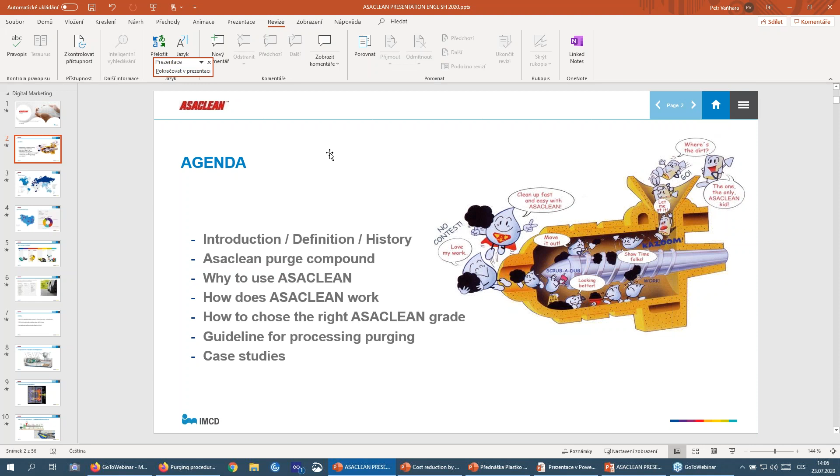Then we will go through some case studies. We will show you some cases and tests which we did in production, because we are focusing on the technical side and following technically with support in production. So we have some photos from some applications.

Okay, so company IMCD operates all over the world. Just to go a little bit in depth, in Europe, or Southeast Europe, we are based in Prague, and we are focusing on the Southeastern Europe market. Just to have some idea, we have also another division called advanced materials - advanced materials like all polymers for plastic. So we are not only doing purging compound, we are also doing some polymers and additives, but that's just information. We are focusing on a lot of markets, lot of products, and applications.

Okay, so IMCD, it was before Velox, just to have some idea, and then we can go a little bit technical. So injection molding machine, I guess most of the audience know it. There is a hopper, a barrel, and injection unit. The material comes into the hopper, then it's melted to temperature, and then it's injected to the mold, and then the end application comes out from the machine.

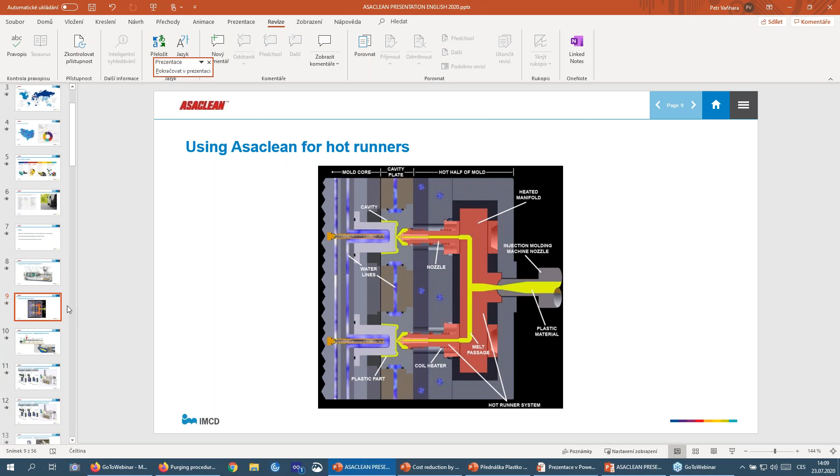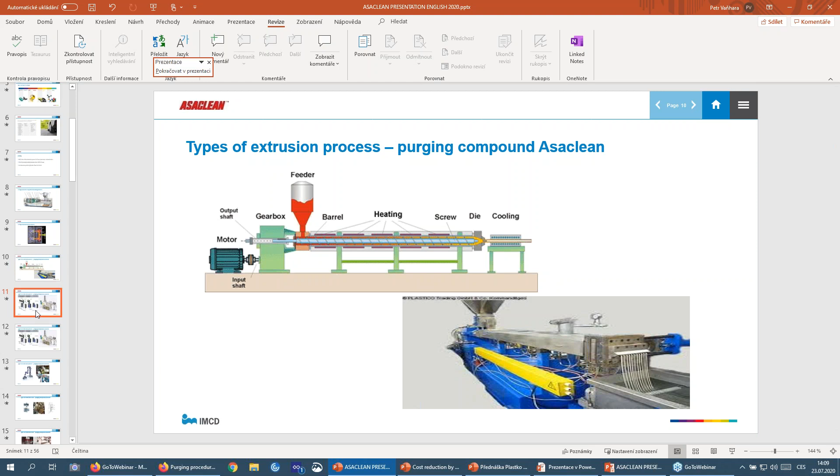On the other hand, we can switch to extrusion. At extrusion, as you know, there are a lot of types. Purging compound can still be used for a lot of kinds of extrusion, for standard extrusion profile, or as you can see on the other picture, for filament producers, or for extrusion blow molding applications, when the polymer is injected to the mold and then blown for the end application, like a bottle. So we can use it also for this process.

For compounding lines, you can see on the right side, you can also use purging compound for compounding lines. But it's a little bit more tricky, because at compounding lines there are a lot of polymers and a lot of additives and fillers which are added to the machines, so it's much more tricky than standard profile extrusion line cleaning.

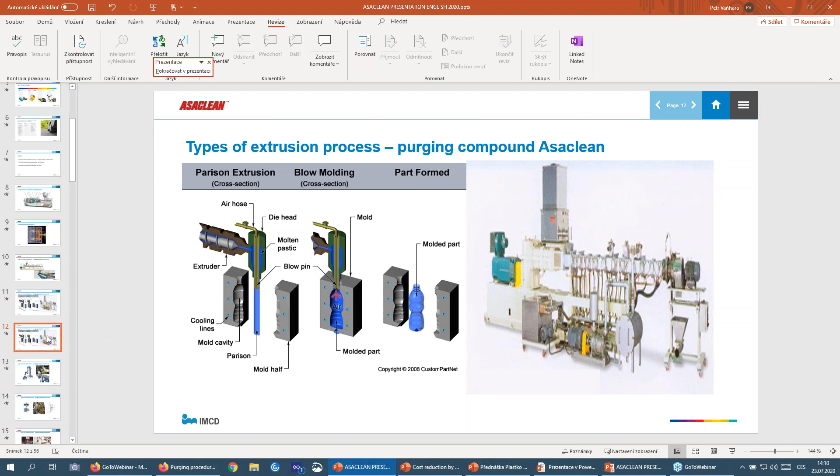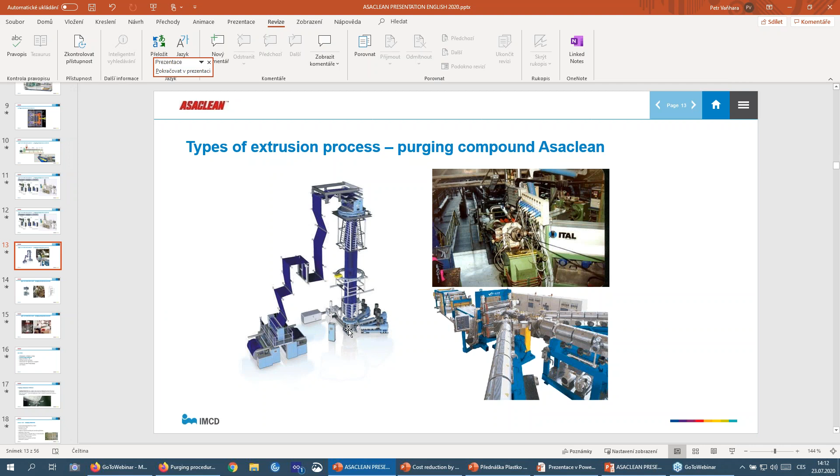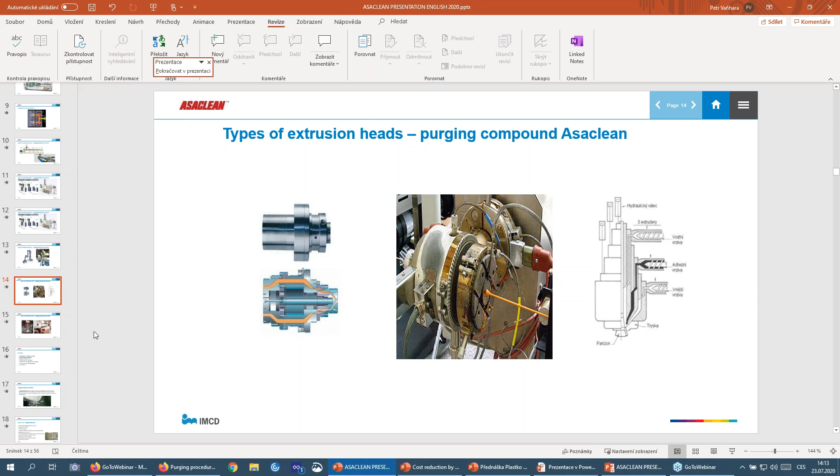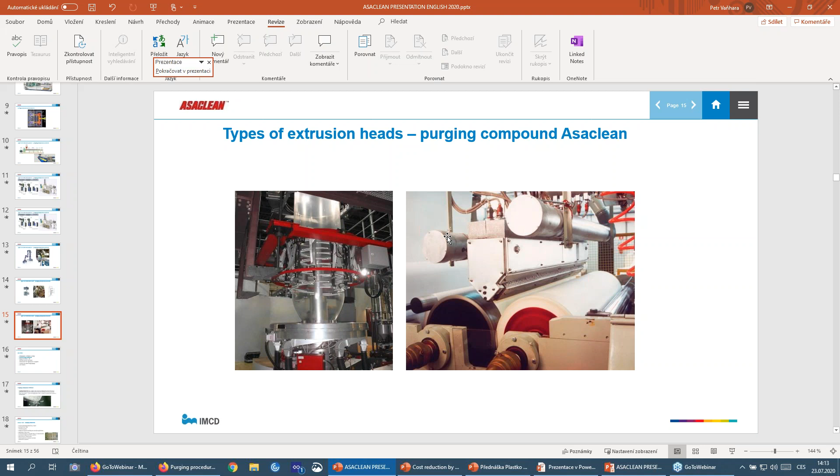So let's go a little bit into what purging compound ASACLEAN is. What is it? What is inside? How does it work? Let's go a little bit deeper. What is really purging compound ASACLEAN?

Purging compound ASACLEAN comes in granules. There are a lot of types of ASACLEAN, and it's still based on some base polymer. Into the polymers, they add some additives which are responsible for the chemical cleaning - just to have some idea, there are detergents and tensides which are responsible for the chemical cleaning.

There are also some grades which are filled with glass fibers - two grades, one filled with 20% glass fibers, and a second type filled with 50% glass fibers. But they have really small length of the glass fibers, approximately 20 times shorter than in standard polymers with glass fibers. So there is no issue that you will damage something in your screw or in the barrel. Just to have some idea.

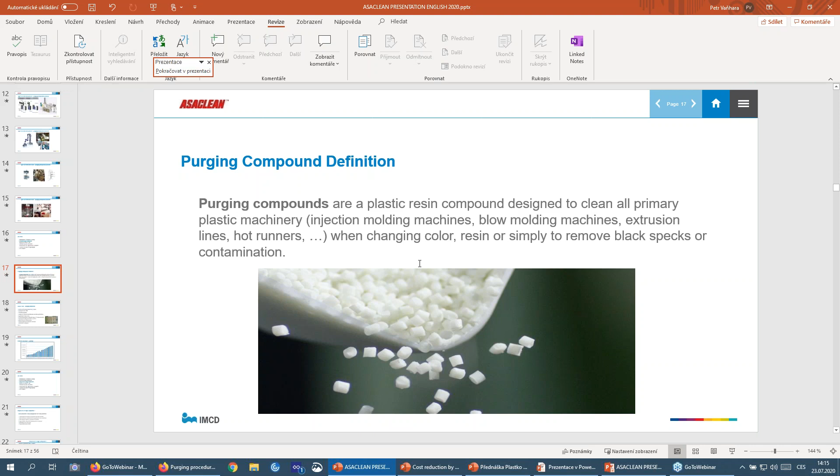So a little bit of the history. The product is produced in Japan. It's produced from 89. There are approximately 17 main grades. There are some grades which are still under development on demand from the market. So it's still moving on. We are trying to focus on the market and what the market is asking.

The temperature range is from approximately 160 degrees up to 420 degrees for the special technical engineering polymers. Standardly, most grades of the purging compound ASACLEAN are styrene based. Then some grades are polyolefin based, and some special grades are polycarbonate or PMMA polymer based.

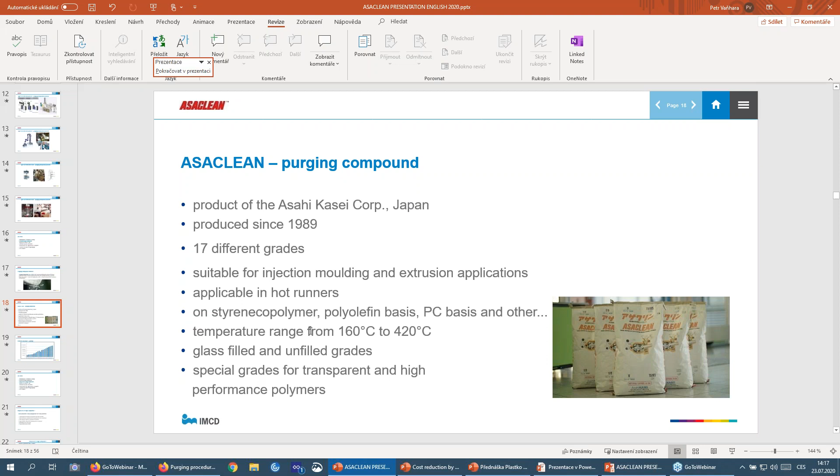As I mentioned, there are also some glass fiber grades, and there are also some special grades for transparent applications, which are very useful for automotive applications, like for injection molding producers which are producing the front or back lights of cars.

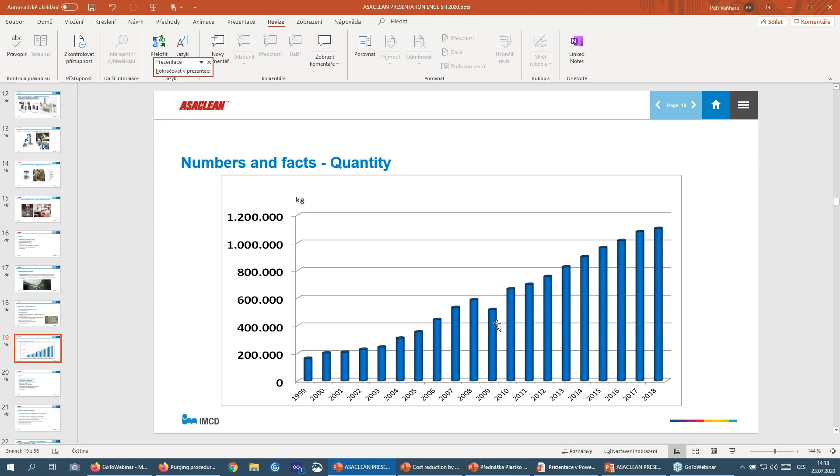There is a small slide just to give some idea of the purging compound ASACLEAN used in Europe, to have some overview of how it increased. There was a little step down after the crisis of 2008.

Okay, let's go through why to use purging compound. Some will ask why not use standard polymers, and what are the advantages of purging compound. Mostly purging compound is used for color and material change, because there are black spots in applications, mostly in transparent applications. But the goal of using purging compound is mostly to reduce the time of switching material or color. It's mostly the economical way.

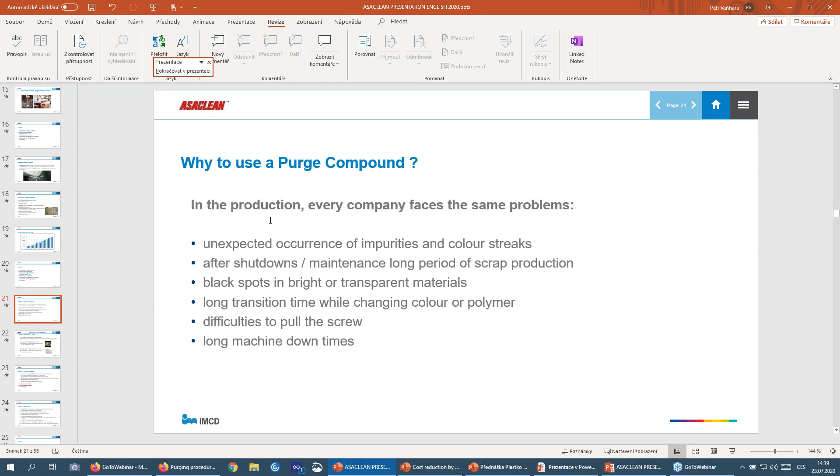I give one slide of possibilities. There are three possibilities to solve problems in production when we have a color change, black spots or not okay applications. The first possibility is flushing with the raw material or base polymer. For example, if you have a color change of polypropylene, some productions also use polypropylene for purging. Sometimes it works, but it takes a lot of time.

We have seen at some productions that it can take from 4 to 8 hours. In the end, maybe you have the application you would like, but it really takes time, and there is a lot of flushing of raw materials. In low applications, when PP costs 1 or 2 euro, it's maybe not so big a problem. But when you use high engineering polymers, the costs increase much more.

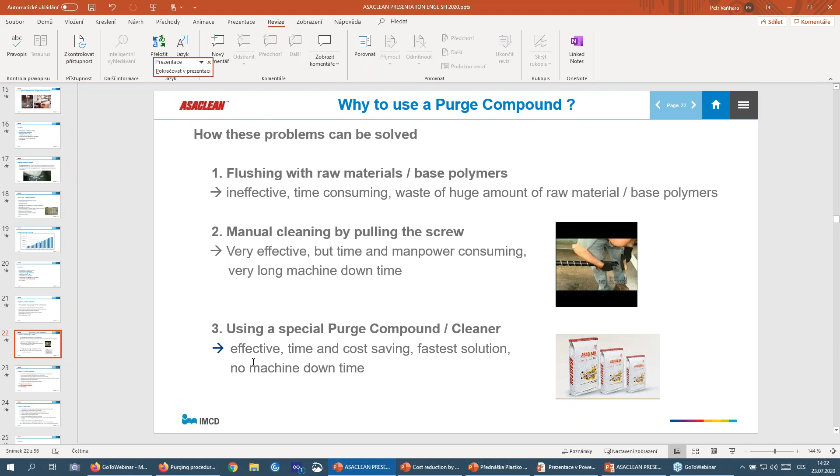On the other slide there are still some words on why to use purging compound, but really the message and the goal is to produce more efficiently, mostly to save time and manpower, and globally to save money in production in the plant.

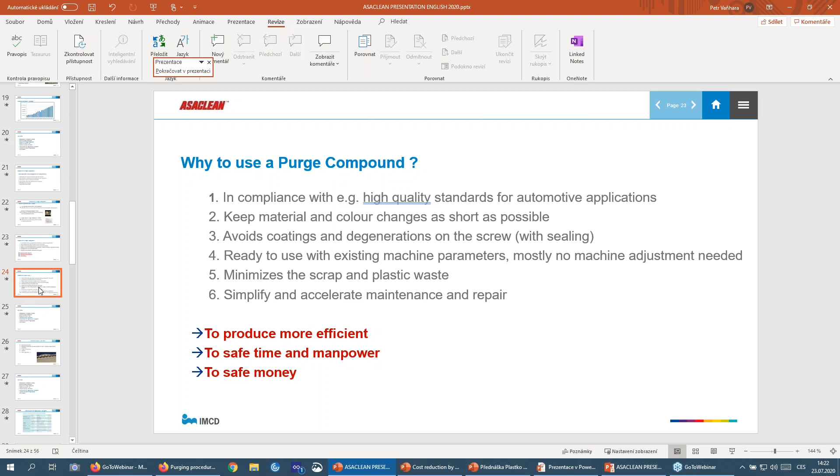Another slide, why to use purging compound. As I mentioned, it's mostly used for color change, to minimize scrap, and to work much more efficiently and effectively in the plant.

Okay, now how does ASACLEAN work? Let's go a little bit deeper into the grades. So how does purging compound work? First, it's mechanical cleaning, like when you use standard polymers like standard PVC or standard polyethylene. Second, we try to use the same chemistry.

So there are a lot of grades. For example, if you have a polystyrene material change, we try to go with a purging compound which is on the same chemistry, a polystyrene based polymer. Then it's working on the viscosity.

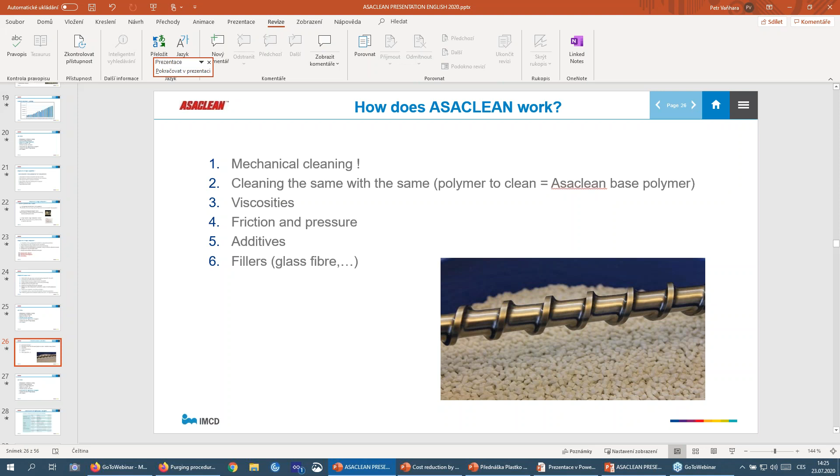So when you put it inside your machine, the ASACLEAN can stay in the machine, and due to the antioxidant inside the purging compound, it inhibits the degradation of the polymer and of the rest of the polymer in the barrel and in the screw.

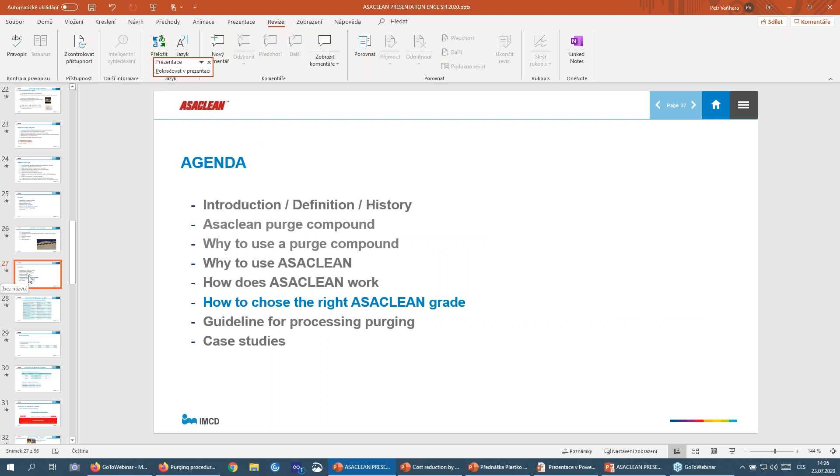Okay, how to choose the right grade of purging compound? It's always the question. There are approximately 17 grades. So basically, I will go a little bit through the main grades which are used in injection molding.

From our experience for injection molding in automotive and other applications, for a lot of engineering polymers like polyamide, PBT, ABS, PCABS, we have good experience with ASACLEAN GL2, which works from 180 to 330 degrees. In the TDS it's mentioned up to 330 degrees, but from our experience you can go up to 360.

Or I will go a little bit historically. Before, it was also mentioned in the TDS up to 360, but sometimes at 360 degrees we can see a little bit of vapor coming out from the machine, and if you don't have an exhaust system, some plants have a problem with this, but the material is safe. It's just the vapor coming out from the purging compound.

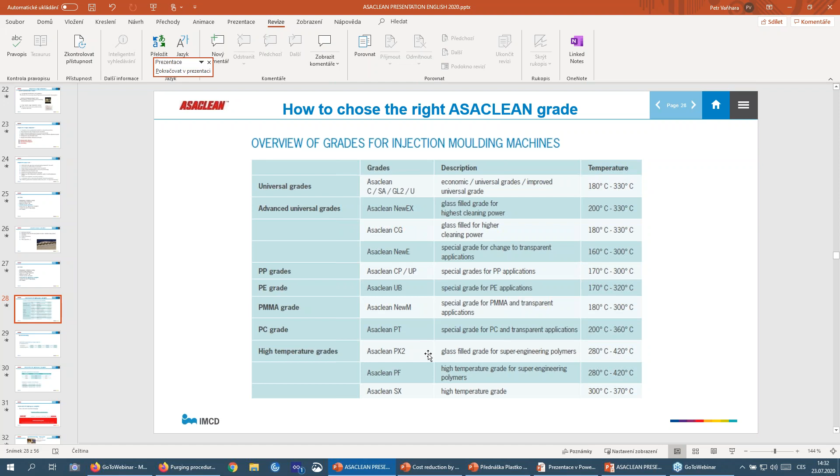So this is an overview of the most used grades. There are also some other special grades, but I will not go into such deep applications now. As I mentioned, this is the standard overview of the most used ASACLEAN grades.

Then on this slide you can see tests we did on how much purging compound you need for a material change, cleaning ABS at 240 degrees. On this line you have the screw diameter. For example, with a screw diameter of 50 millimeters, we measured that you have to use approximately 1 kg of ASACLEAN for the purging process.

So this table can be used when you start, to get some idea how much sample material you will need for the first test. It's just to have an overview, but it was done on an injection molding machine, and it was measured.

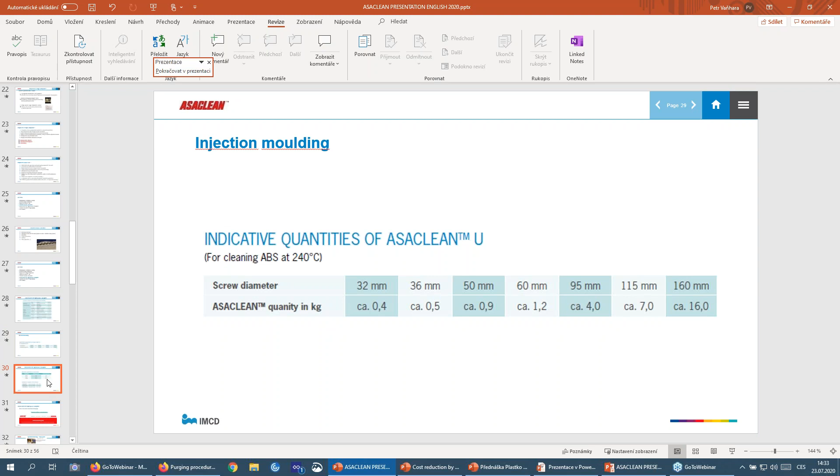Okay, so let's go for some mostly used grades in injection molding process. So there are a little bit less grades. For extrusion process, the most used grades are ASACLEAN UB and ASACLEAN UL2. These both grades are based on polyolefin polymers, and the MFR is a little bit higher, due to that it can be used in extrusion process.

So when we are going to extrusion lines, we are using more the grades which have the MFR a little bit higher. And then there are also the standard grades ASACLEAN U or GL2, which can be used also for extrusion lines for more standard engineering polymers, and ASACLEAN UB and UL2 are used for polyolefin applications, or can also be used for PVC lines, PVC cable lines, so soft PVC, or it can also be tested for hard PVC.

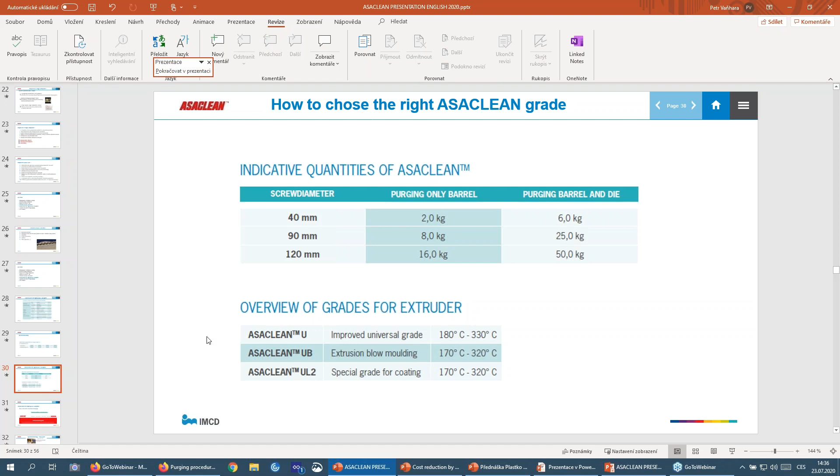Okay, so now we are switching to the processing of the injection molding process. On this slide, there is a prescription of how to use purging compound in injection molding for purging the screw and the barrel. First, you have to eject your previous material. For example, if it is black polypropylene, you have to eject the PP.

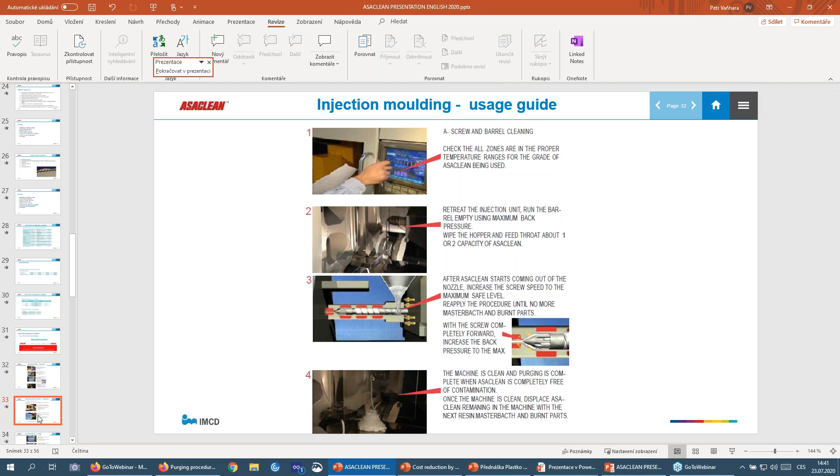So at these steps, when we are sure the barrel and screw are clean, when we see that the purging compound is really white, we can switch to hot runner system cleaning. Why can't we do it in one step? Because we want to be sure that the barrel and the screw are clean, and we will not carry black spots into the hot runner system. So after cleaning the barrel and screw, we can switch to hot runner system cleaning.

Standardly, you can purge the purging compound into the open mold. So you open the mold and inject the purging compound into the open mold through the hot runners and through the nozzles. You can do one, two, three shots. It depends on your machines and the application, but it's the same as when you are purging the barrel and the screw, when you see that white purging compound is coming from the hot runner system.

Then on this step, you can be sure that you have done the good work and the hot runner system was clean. What you can do? So standardly, you can purge through the hot runners at the temperature of your used material. For example, if you are using polypropylene, which is standardly used at, I don't know, 200, 210 degrees, you can go through the hot runners also at 200, 220 degrees.

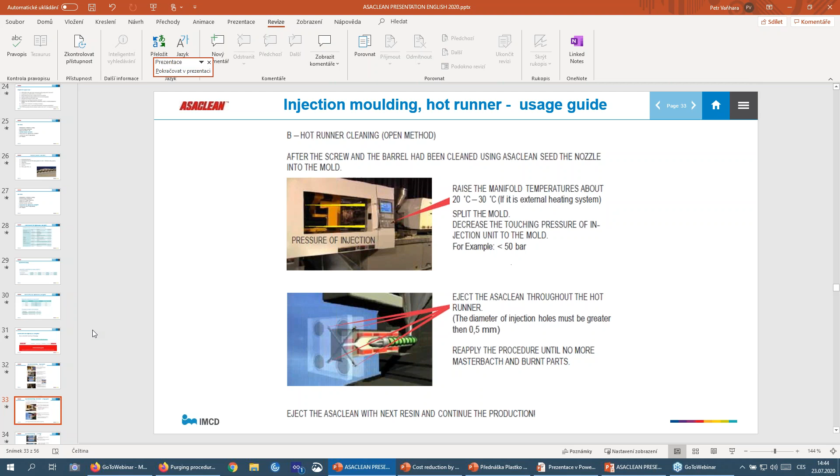Okay, let's switch to the third method, which we named sealing. You can imagine it like shutdown of the machines. So it's as efficient as the purging process. This is done mostly when you have not worked with your machines, or during summer shutdowns, or during winter shutdowns. A lot of plants are using purging compounds for sealing the machines. So the method is the same.

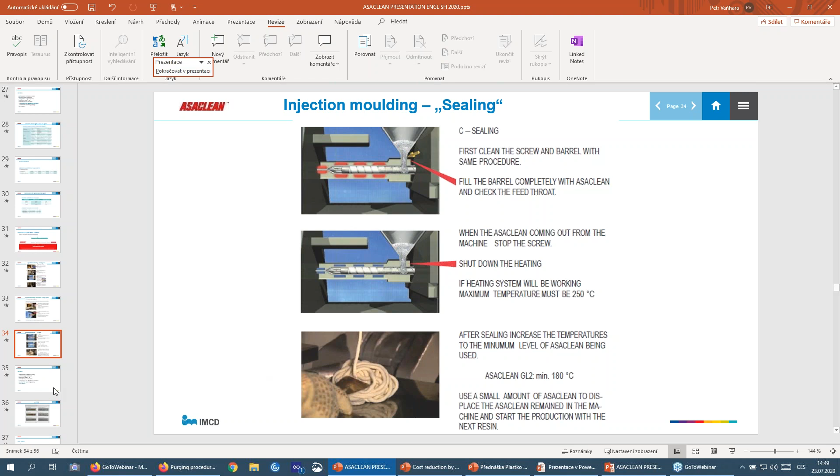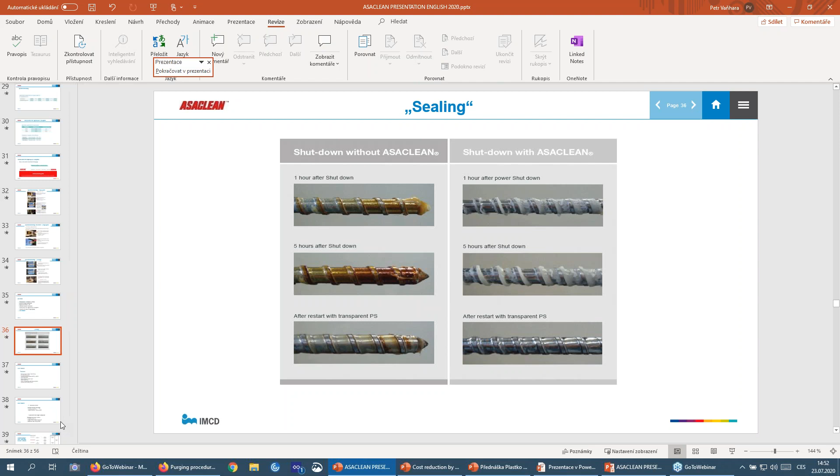Okay, so this is the test with polystyrene, and then I would like to show some tests, or go a little bit more to the economical numbers. So we did some tests at injection molding machines with screw 60 millimeters, 48 cavities. It was with the temperature 220 degrees up to 240 degrees processing window. The polymer was HDPE, and it was a color change from dark blue to HDPE nature.

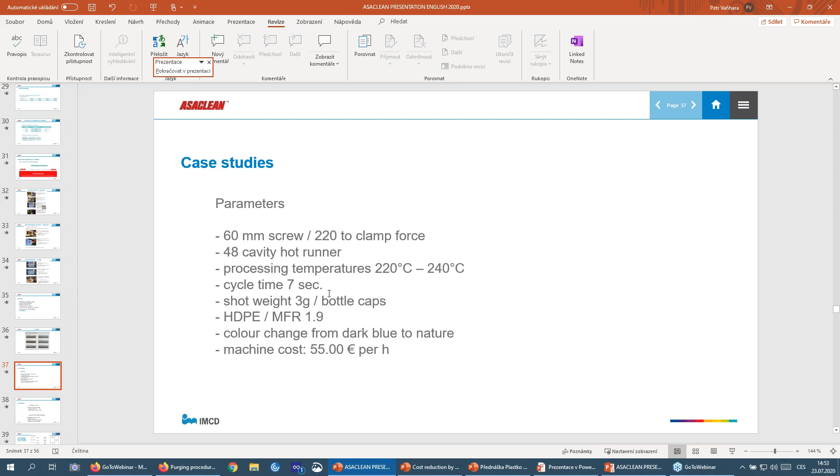They calculated the machine cost at 55 euros. So it means electricity, manpower, and other costs. So we did the test, and we compared the test. The first was by standard procedure without using purging compounds. So for switching color, standard HDPE polymer was used. So we did this test. So the color change took 5 hours, and we had to use approximately this amount of kg of HDPE.

On the other hand, we used purging compound. It took 1 hour, and we had to use 10 kg of ASACLEAN. Yeah, ASACLEAN is costly when you compare to standard HDPE. So 1 kg of ASACLEAN in this application, we calculate approximately 10 euros per kg. Yeah, it's costly when you compare to standard HDPE, but when you calculate, finally, it's economically efficient. And at the second test, after 10 kgs of using ASACLEAN, we needed an additional 50 kgs of HDPE material.

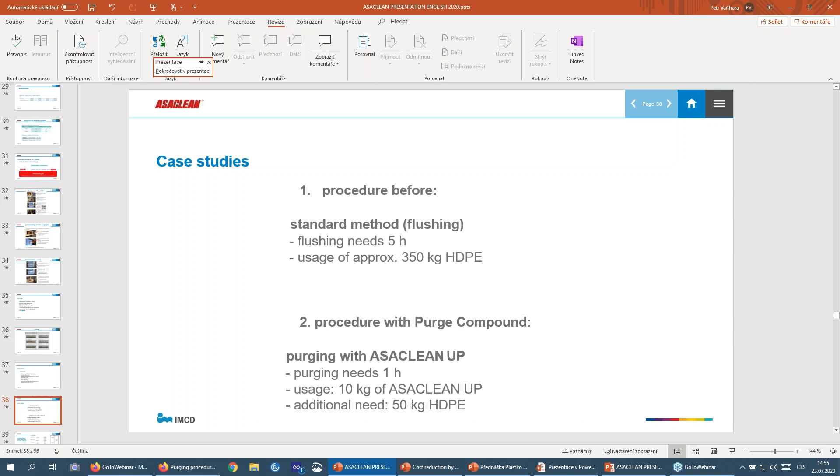So with the current method, when we don't use a purging compound, we need 5 hours. So this is the main costly factor. So we needed 5 hours, which is 5 times 55 euros. We already mentioned that the 1 hour cost of the machine is 55 euros. So this is 275. Then we have to use 350 kgs of HDPE, which is a very low cost material. So 350 euros. So in total it was 625 euros when we don't use ASACLEAN.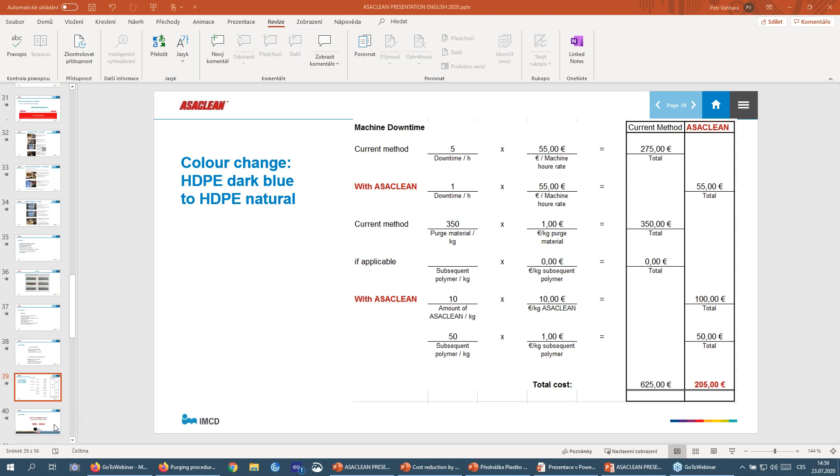Yeah. So for example, in this case, there was 420 euros saving. And this is only on one machine. So when you have many more machines in your production, and when you have a material change 1 or 2 times per week, the savings numbers are increasing. So this is just to show you and just to give you some idea.

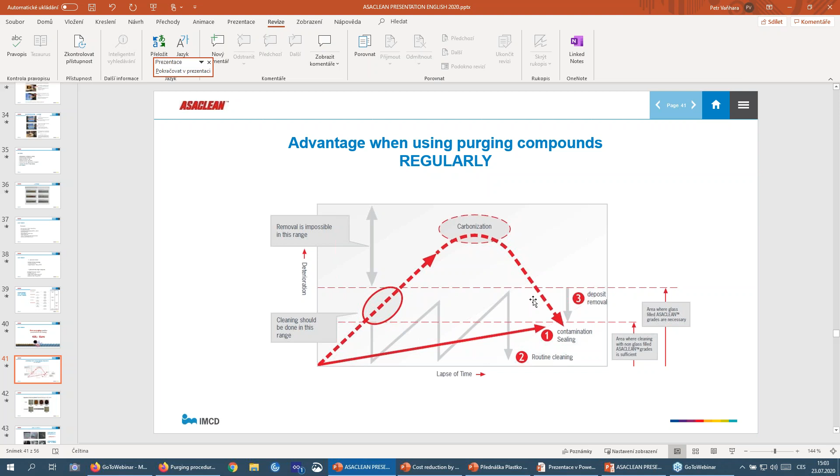So this slide just shows that the purging compound should be used on a regular basis on the machine. Sometimes we have requests to come to production to solve the problem, but when the machine was not used with purging compound for 2-3 years and a lot of material was used on the machine, sometimes there is no way, and you have to clean manually. So this is just to show that you need to use the purging compound regularly.

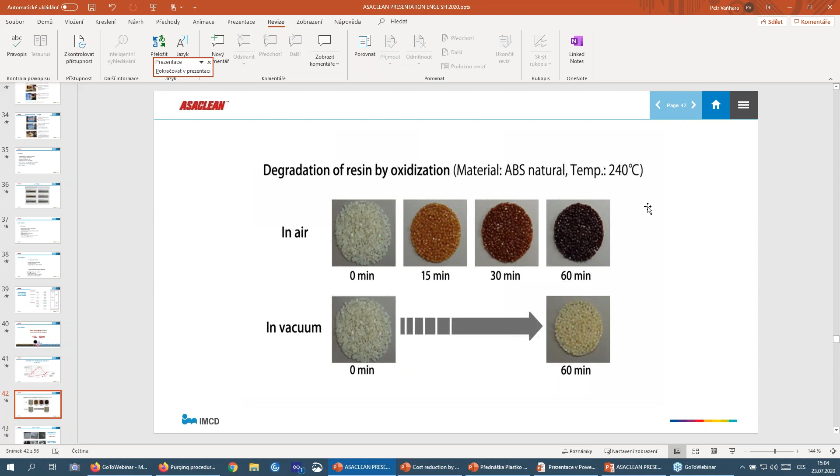It becomes a really black material which can cause black spots, and which can stick on the screw or on the barrel. So this is just to give some idea of the degradation of polymer in the machines.

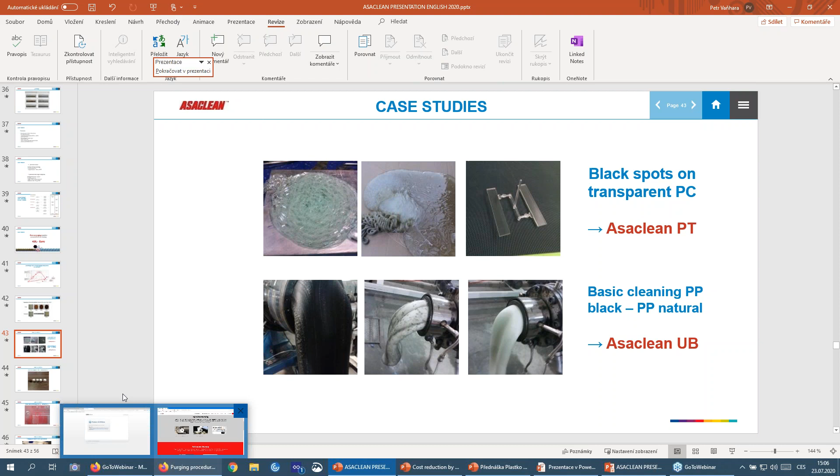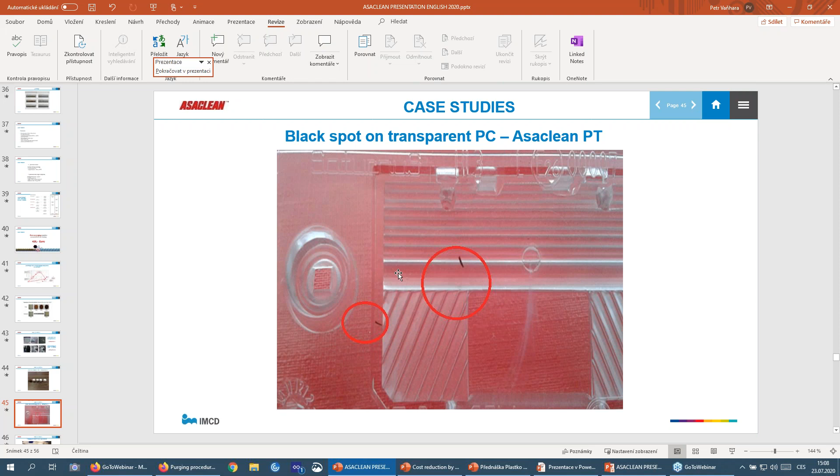This is mostly seen on transparent applications, because every small black spot can be seen on transparent application, so it's much more tricky than with black application parts.

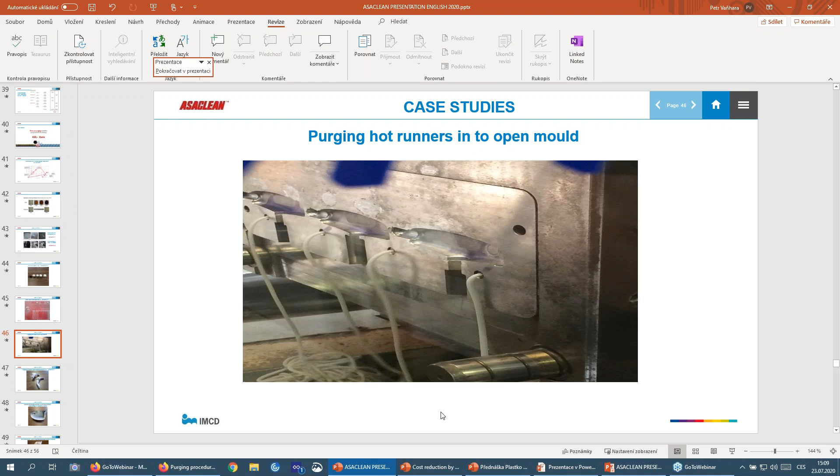So we used ASACLEAN GL2. We inject it into the hot runners and performed the shutdown method. We shut down the hot runners with ASACLEAN GL2, then switch on the machine. We increase the temperature, and the purging compound was able to eject out the burned parts. So the customers don't need to take out the hot runner system and clean it mechanically. After some hours, they can continue production.

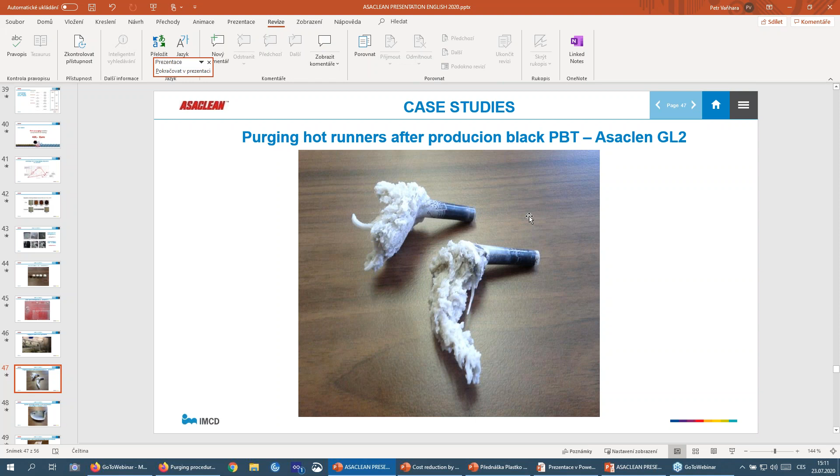What we would also like to mention is that ASACLEAN is also possible to inject in the closed mold. So there is a way that you can inject the purging compound into the hot runner system and into the closed mold. We recommend not filling the mold to 100%, but maybe filling it, for example, at 90%, which is much more safe. But it's also a way that you can purge into the closed mold, where all the pressures are working, so it's much more effective compared to standard purging into the open mold.

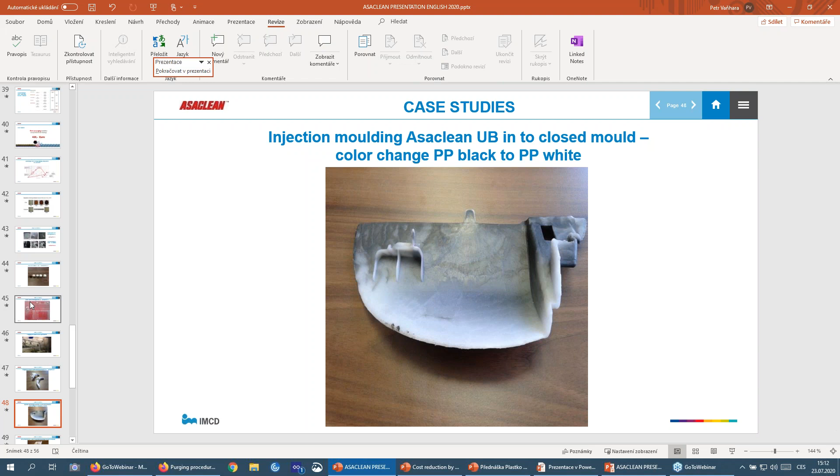Yeah, this is also an example where we inject the purging compound into the closed mold. So when you're not 100% sure, there's also a way to use a mixture - 50% ASACLEAN and 50% of your polymer, injected into the closed mold. This is also a way. And if it works with no issue, you can increase the percentage of ASACLEAN and inject the purging compound into the closed mold.

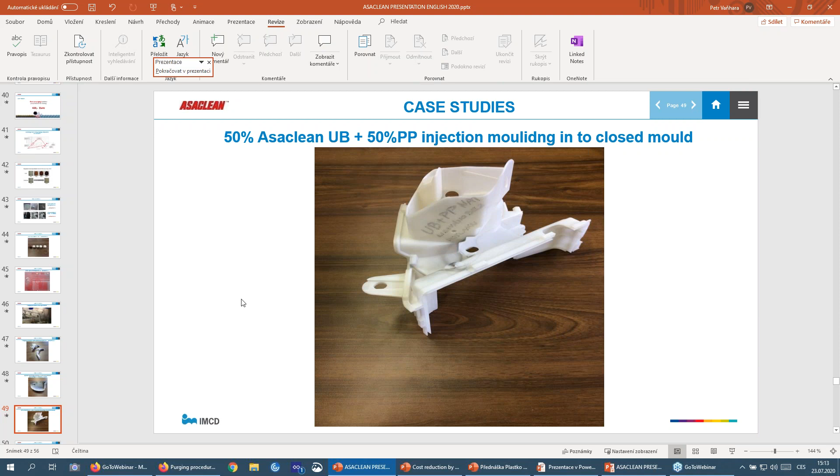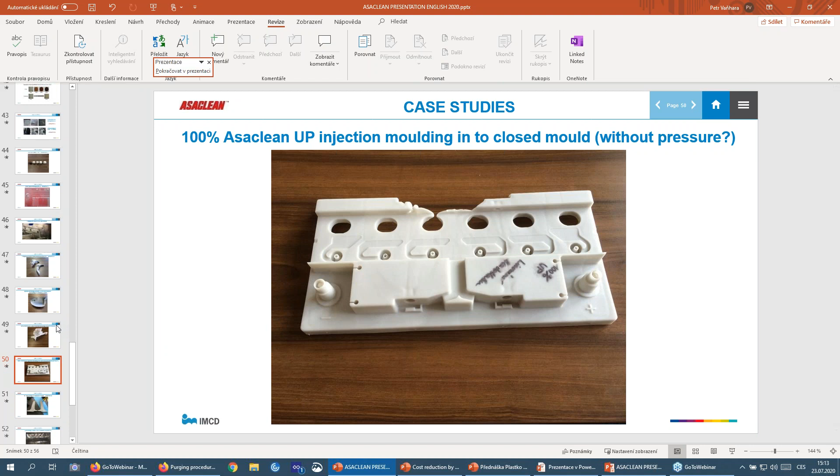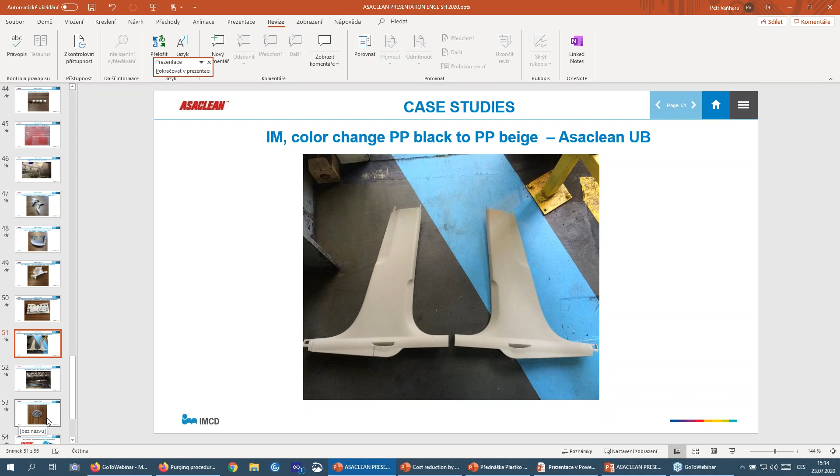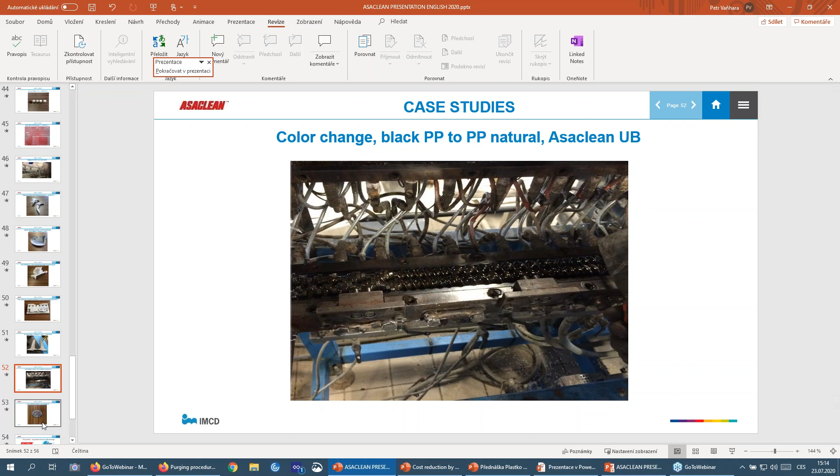When you have an extrusion line and are doing the purging compound process, we recommend after the purging process to change the sieve and give it a completely new sieve after the purging compound process.

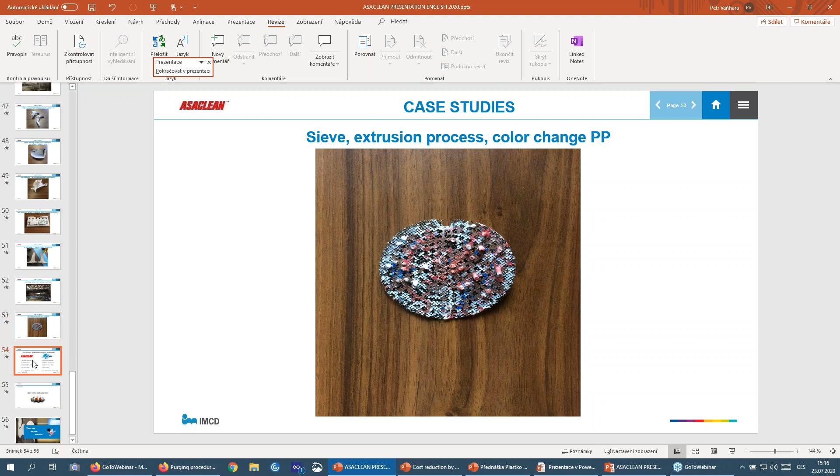Okay, I guess we are getting close to the end slide. I would like to also mention at the end that there is the purging compound ASACLEAN, which works from 160 to 420 degrees, and is suitable for injection molding and extrusion applications, which we covered at this presentation.

On the other hand, we would also like to mention that there is a new Clean Plus compound, which is more for cheaper applications like polyolefin applications, PVC. The temperature range is not as big as ASACLEAN - it works from 140 degrees to 240 degrees. But based on our experience, for low price polymer applications like PP, polyethylene, PVC, and other polymers, it works. So for this application, you can also use Clean Plus, which is a little bit cheaper than ASACLEAN.

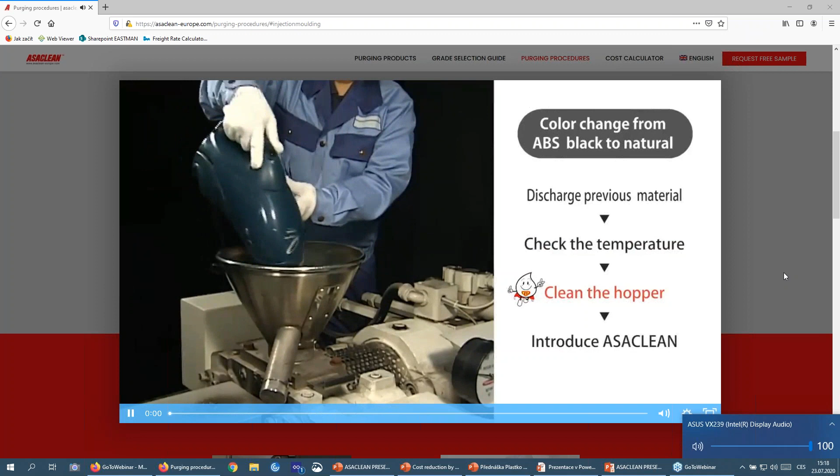After the previous material has been discharged, proceed to purging by maintaining the same temperature. Clean the hopper before introducing ASACLEAN. Please make sure that none of the previous material remains inside the hopper.

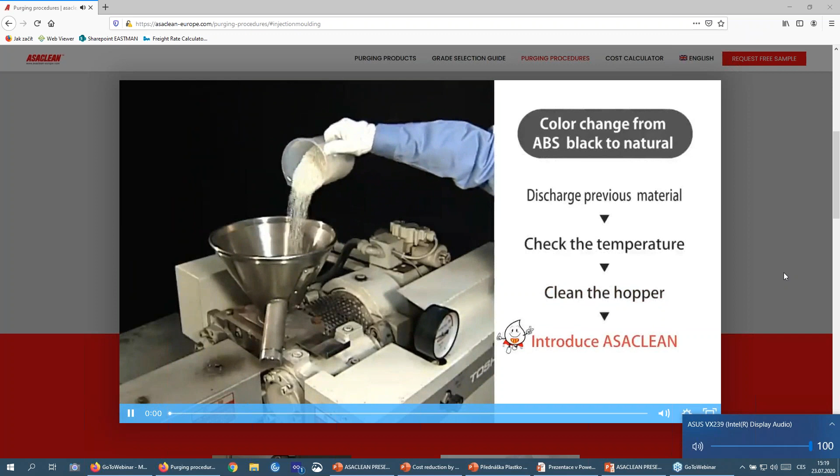Introduce ASACLEAN. The standard usage amount of ASACLEAN is shown in the table. The actual amount may vary depending on the resin to be cleaned, the capacity of the molding machine, and the level of contamination.

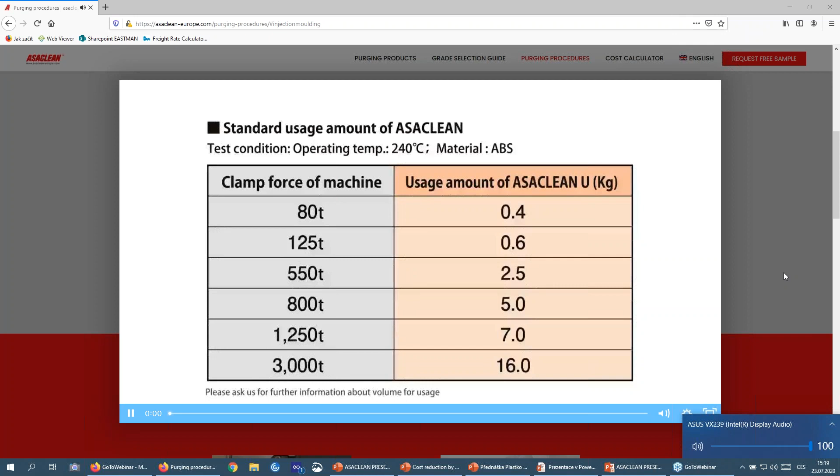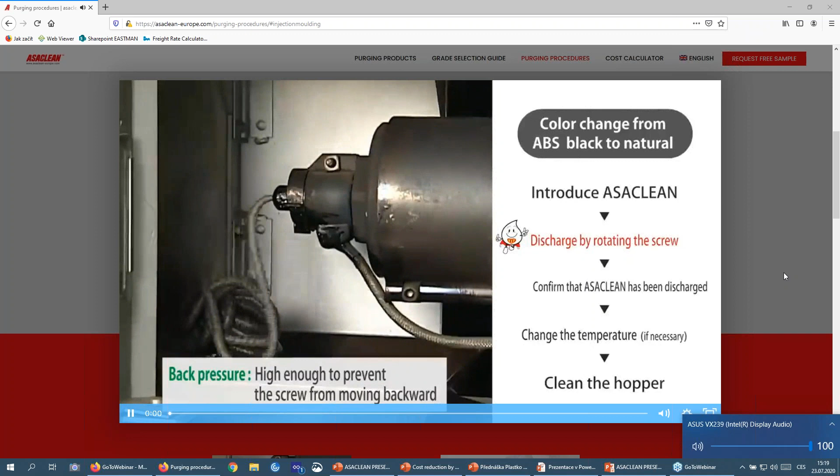Start cleaning by rotating the screw. The rotation speed is the same as at the time of molding. Set the back pressure high enough to prevent the screw from moving backward, and set the screw position at the forward limit.

Check that the previous material has been completely discharged. Visually confirm that the color of the previous material is not mixed with the discharged ASACLEAN. If any color of the previous material remains, add ASACLEAN and repeat the cleaning procedures.

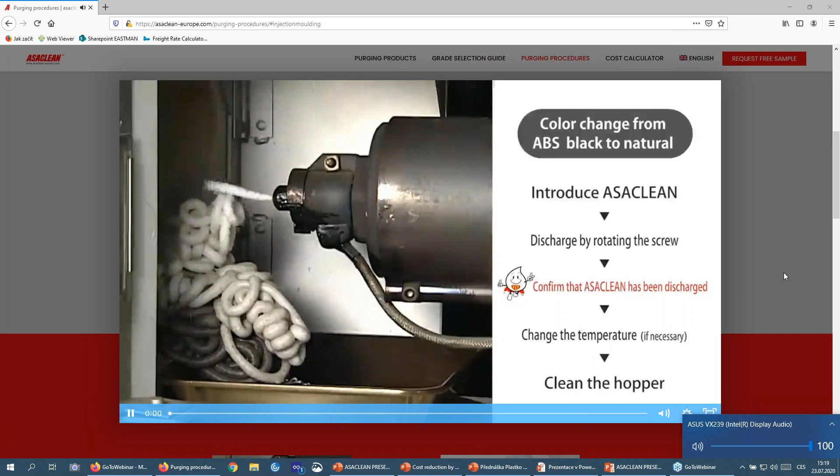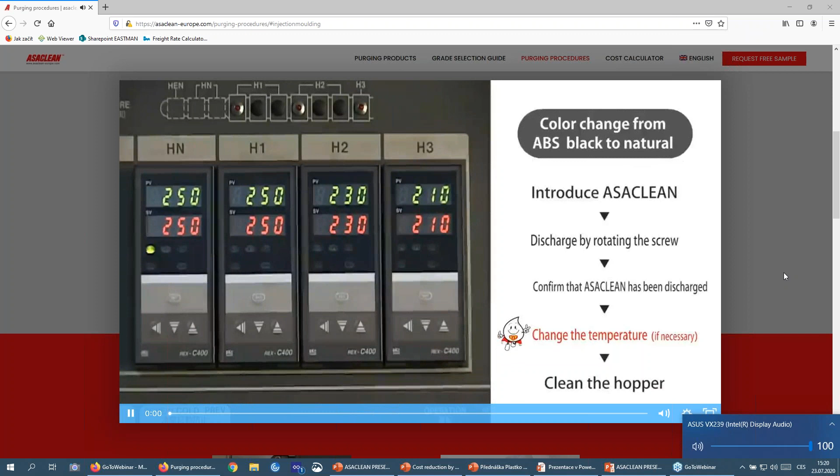If a temperature change is required for the next material, change the settings at this stage. Clean the hopper and introduce the next material. Discharge ASACLEAN by rotating the screw.

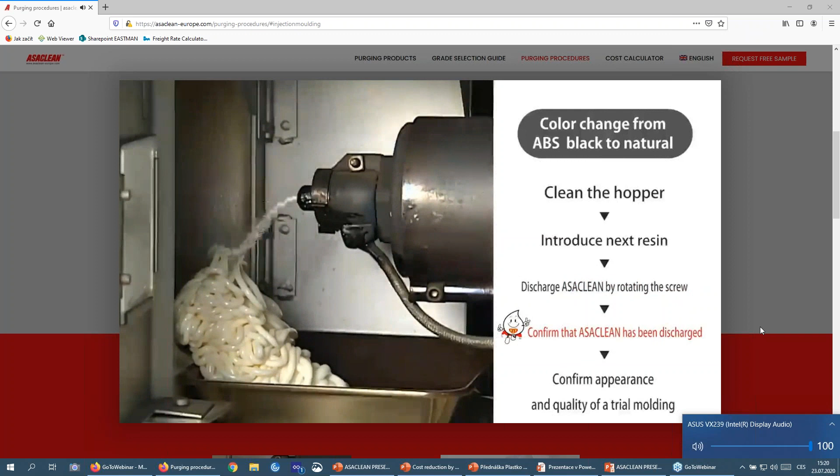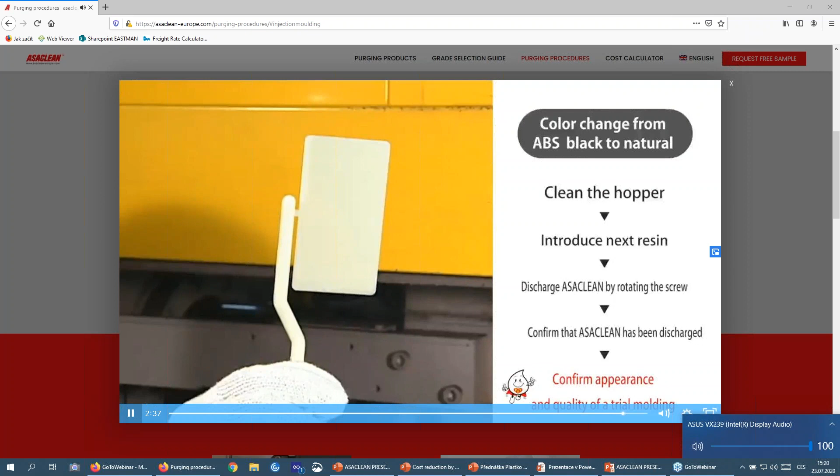Make sure that the material has been changed to the next material. This completes the color change. Be sure to check part appearance and quality by doing a trial molding before starting automatic molding operations. Do not recycle the molded object or the runner used for the dummy part back into the molding material. This is the basic ASACLEAN cleaning method.

So this was just the basic method of using purging compound, and you can also find some overview in the videos. So we are coming to the end of the presentation.